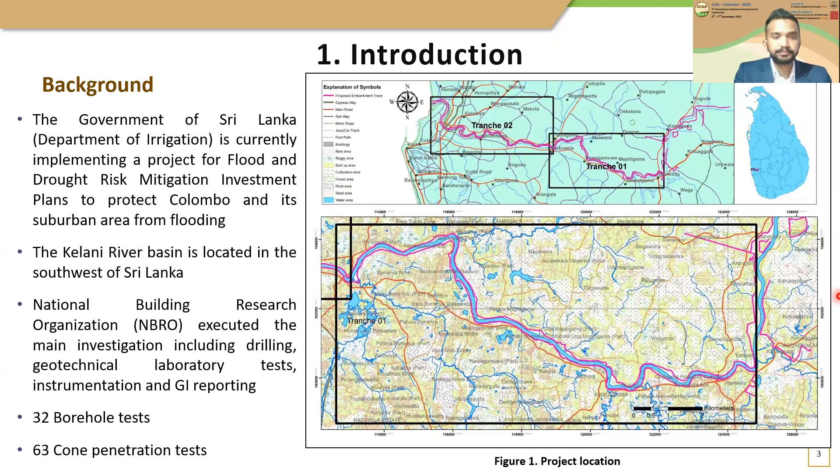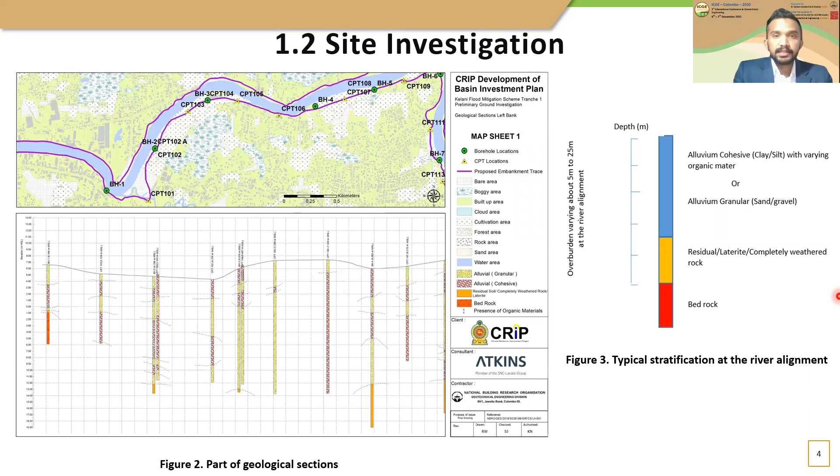Now I will move on to the problem statement and objectives of the study. Laboratory testing of undisturbed samples, limited number of tests, applicability of in situ test are major difficulties and drawbacks with respect to determining material parameters. Therefore, correlations play a foremost part in providing such parameters. However, continuous feedback of data from local experience to confirm, validate, and even modify the existing correlations are necessities.

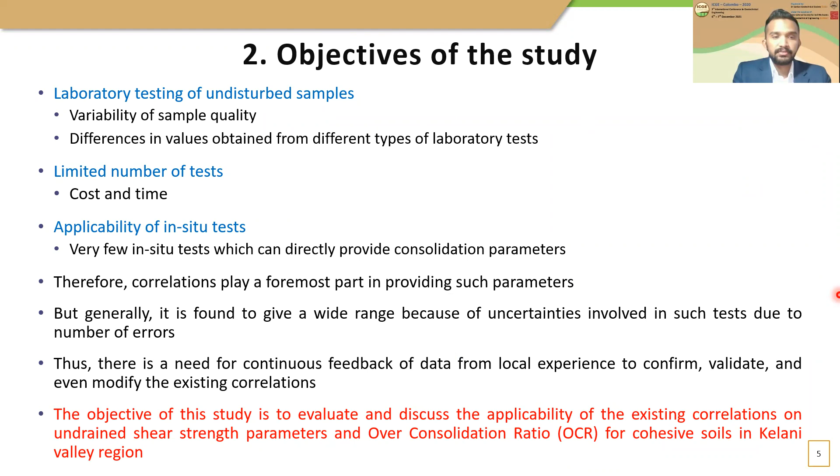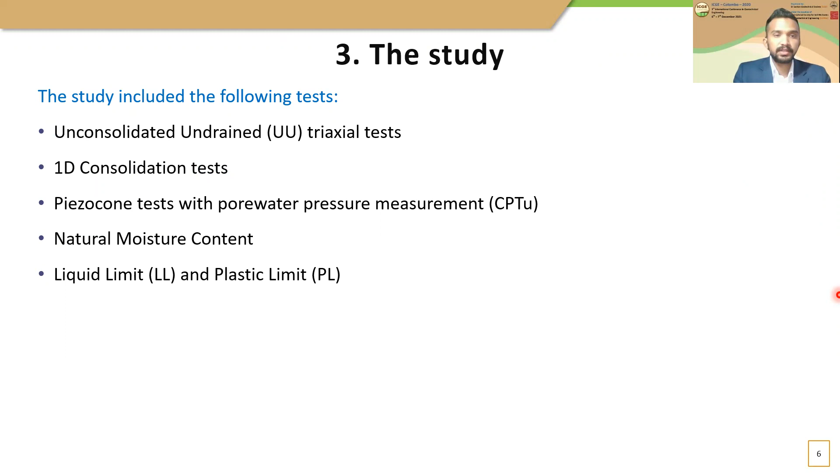Hence, the objective of this study is set to evaluate and discuss the applicability of existing correlations on undrained shear strength and over consolidation ratio for cohesive soils in this Kelani Valley region. Now I will move on to the study path. We have carried out following tests during the project and results obtained through these tests used in the discussion. Unconsolidated undrained triaxial test, 1D consolidation test, piezocone test with pore water pressure measurements, natural moisture content, liquid limit and plastic limits.

First discussion point is findings from UU triaxial test. The result of 16 UU triaxial tests and index property tests were used in this study. Accuracy of the results obtained from the UU triaxial test to ascertain the pre-consolidation pressure was checked with the correlation of Cu/σ'v = 0.22 for normally consolidated clay and Cu/σ'p = 0.22 for over consolidated soils respectively. Soil behaves as NC or SOC generally confirms Mesri's proposal, while the results of soil behaving as OC differs greatly.

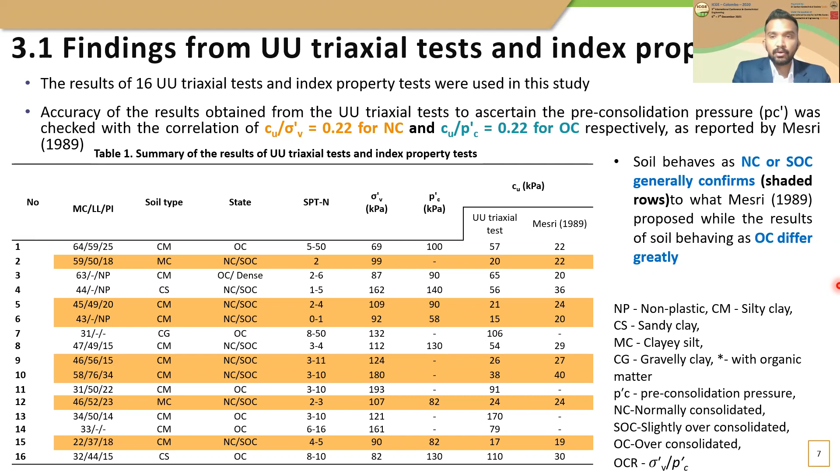My second discussion point is calibration of cone factor with UU triaxial test results. The value of Cu estimated using corrected cone resistance is one of the most important empirical approaches in the interpretation of CPTU results, where Nkt is the empirical cone factor. We plotted Nktu values with respect to the plasticity index values in the plot suggested by Stark and Delashaw, where a clear trend is observed of increase in cone factor with PI. You can see the dotted line here.

So compared to the cone factor ranges of 10 to 24, that is the results of our studies, we cannot see any dependency between the Nktu and plasticity index. That means we are seeing an independent relationship between Nktu and plasticity index. Some researchers suggested that Nktu is independent and some others say it has a relationship with plasticity index. Therefore, it is recommended to have more studies on this relationship.

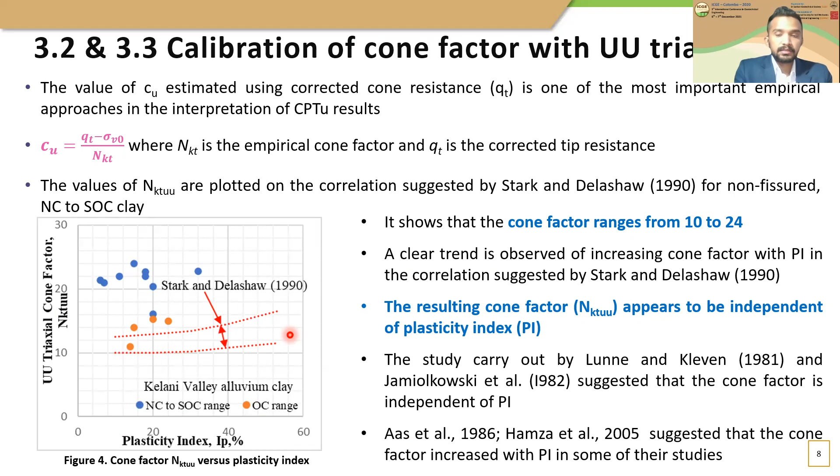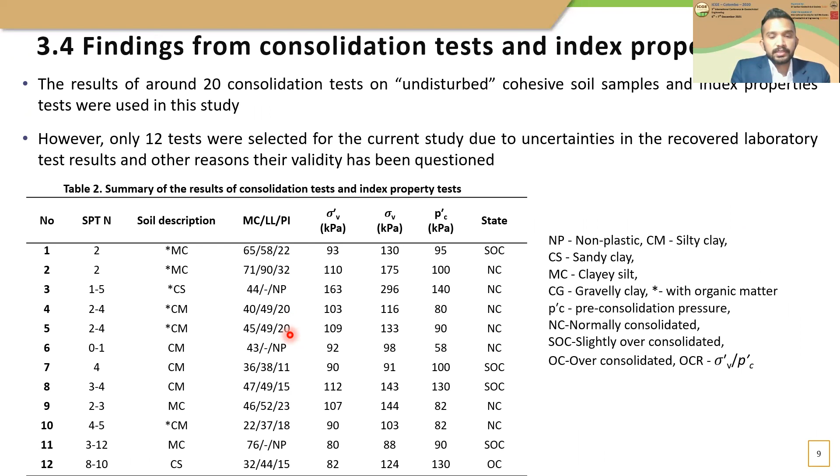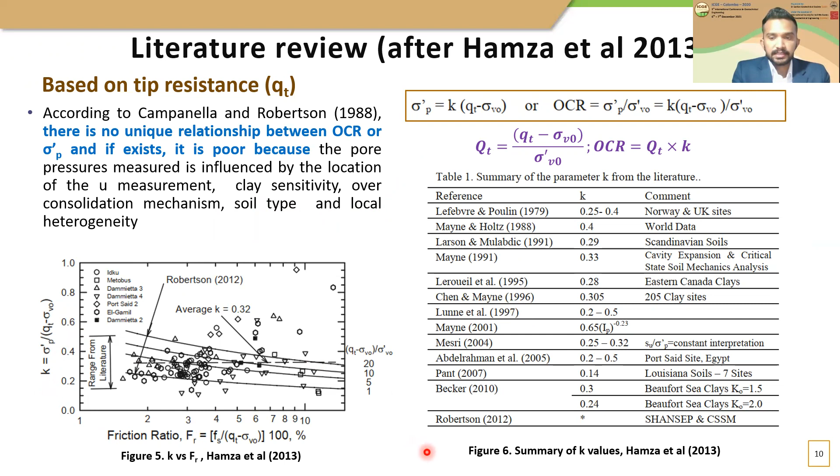Hamza et al. collected and presented the values from the past studies. In their study, K versus friction ratio are plotted. According to Figure 6, we can see the range of K values reported in the previous studies. Then a comparison of results from consolidation test and CPT test were carried out. According to this table, there is a good agreement between the results from normalized cone resistance with the consolidation results for normally consolidated soils and also slightly over consolidated soils.

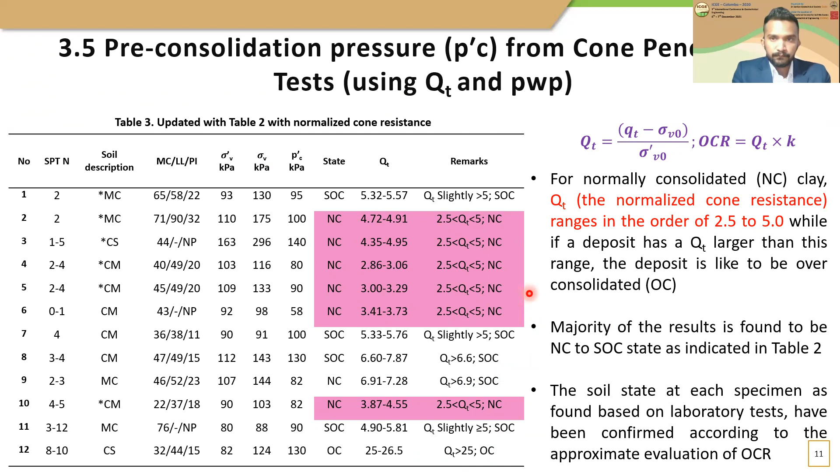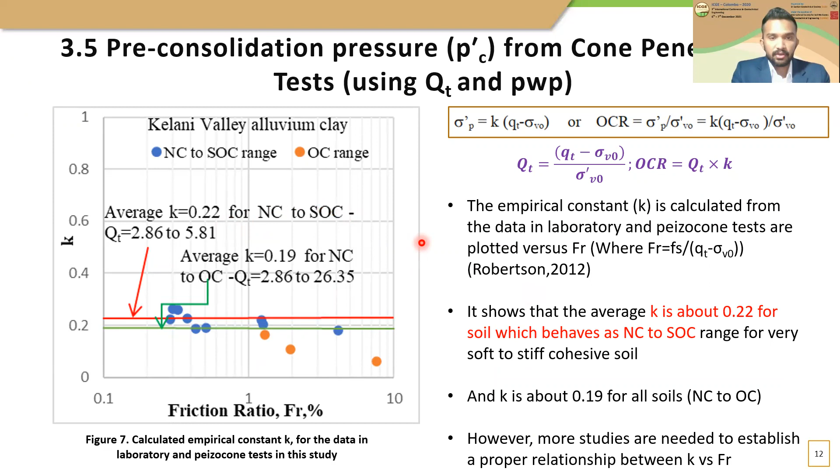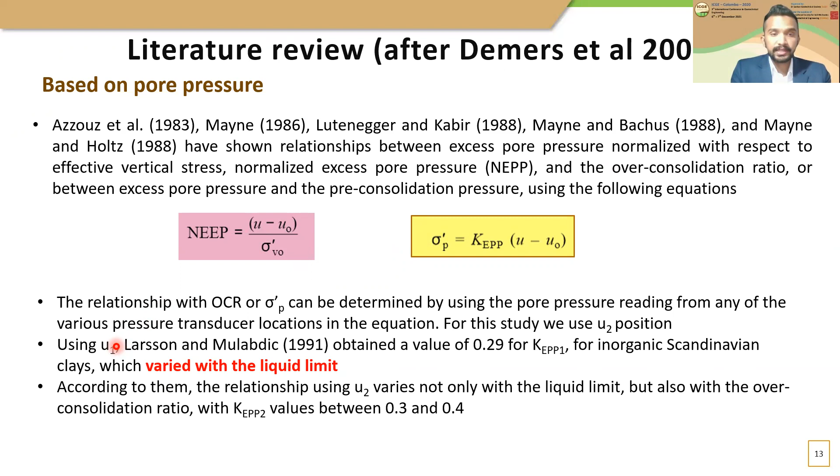Moving on with the presentation. Now I'm going to talk about correlations based on excess pore water pressure. Many researchers have shown relationship between excess pore water pressure as shown in these two equations. And Larsson and Mulabdic obtained a value of 0.29 for KEPP for inorganic Scandinavian clays which varied with the liquid limit. In our studies also, we plot KEPP value with liquid limit. Particularly, finding a reliable OCR value based on pore water pressure could be very useful in very soft soil conditions. The average KEPP is about 0.42 for very soft to stiff cohesive soils which are found in Kelani Valley.

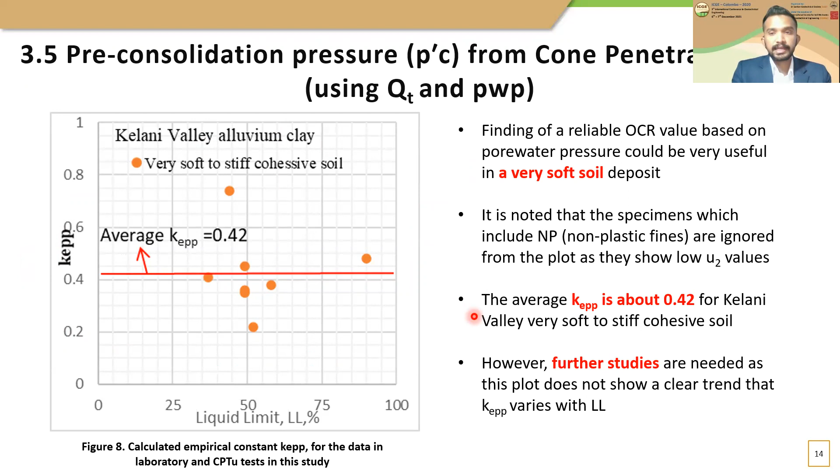Finally, the conclusions of the study. Calibration of Cu with UU triaxial test is possible using method proposed by Mesri. The cone factor Nkuu relating the UU triaxial test to the cone tip resistance of CPTU ranges from 10 to 24 and has an average value of approximately 17 for very soft to stiff saturated clays found from Kelani Valley area. If only NC to SOC soil is selected, the cone factor is within the range of 15 to 24. The cone factor Nkuu appears to be independent of plasticity index except for soil having considerably high OCR.

The average K in the mostly used correlation could be taken to be 0.22 for soil which behaves as NC to SOC range or very soft to stiff cohesive soil, while K is about 0.19 for all soils found in Kelani Valley. The value K slightly increases with decreasing FR as predicted by Robertson. Yet, further studies need to be carried out to make a strong conclusion in this regard as well. The average empirical constant of 0.42 could be used for soil which behaves as very soft to stiff cohesive soil. However, the statement made by Larsson and Mulabdic needs to be further studied as the plot of KEPP versus LL does not show a clear trend that KEPP varies with liquid limit.